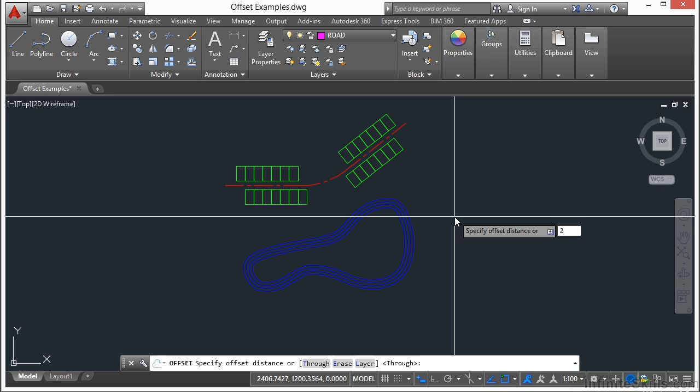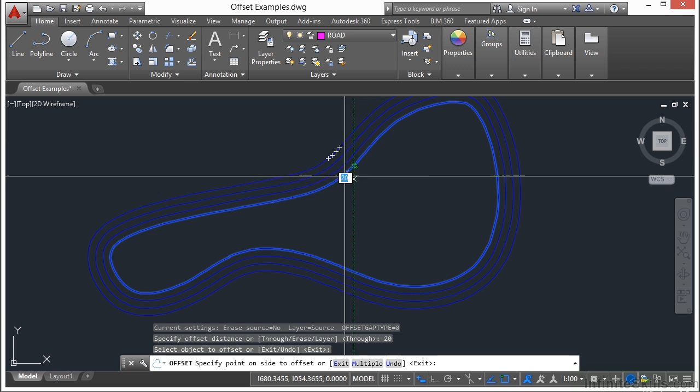First of all, you want to type in a distance. In this case, I'm going to type in 20. Press return. Now let's select the object to offset. I'm going to zoom in, pan around, and select this line right here. Now when you start this part, after you select the line, it starts right into the offset command. So you can see a little preview of where that new line is going to go. And I'm going to offset this line that I've selected by 20 units, either on the inside or on the outside of the line. Let me zoom in here a little bit closer.

You can even see as I move my crosshairs around that I get that little dimension there that AutoCAD is reminding me that, hey, you're offsetting this 20 units. And you get that little preview. Where the new line is going to be created relative to the original line depends on where you position your mouse according to that original line. So whichever side of the line you put it on, that's where it's going to go. So once you have your cursor in position, left click. And you have created a new line offset at 20 units.

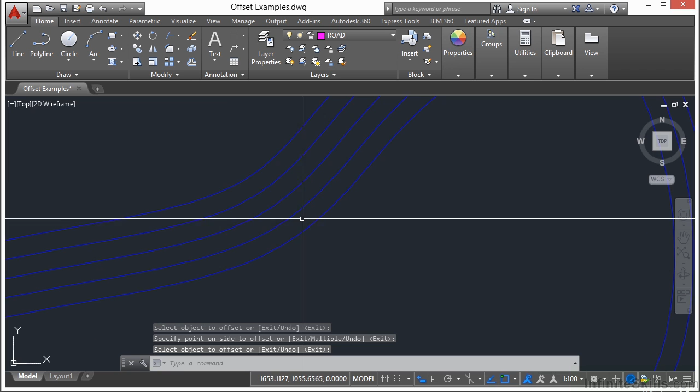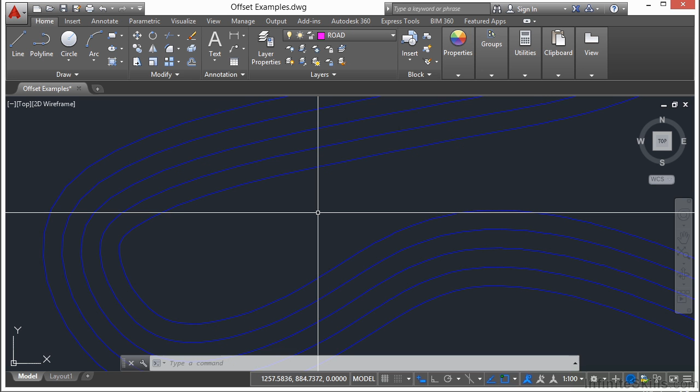So wherever I measure, if I measure an exact perpendicular distance from here to here, I am going to have two perfectly offset parallel lines that are 20 units apart all the way around. And it's actually that simple. So maybe you don't want to offset by a specific distance, but want the new line to pass through a specific point. So let's say you don't know what that distance is. You can do a couple of things. You can measure it, you can do the math, or you can guess, and then you can type in the distance. Well, the offset command has an option.

So for example, let's scroll up to this little roadway. We have the center line, we have the lot lines. Let's say we want to put a new right-of-way line that parallels the center line, but matches up with the front of these lots. I don't know what that distance is. So I'm going to start the offset command, press return, and you can see here that I have different options. Now these three options allow me to do different things.

One is the layer. This way I can offset my new object and put it on a specific layer, which is actually a very nice thing because a lot of times I don't want it to go to the same layer. It's kind of like doing a copy command. You can see here when we did our contour line, it copied that old one. It left it on the same layer. So I'm going to change the layer, type in L. I can say current or source.

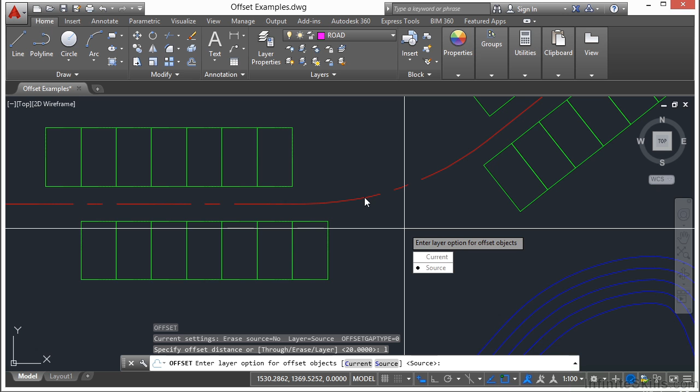So the source is the default setting for your offset command. And the source just means it's going to match the object that you're offsetting. I'm going to switch it to current because currently I'm on the roadway layer. Okay, so now when I create this, it won't be this red center line. It'll be a magenta colored line. And I can also pick an erase option. If I pick the erase option, which in this case I don't want to do, it will erase the original line and only create the new one.

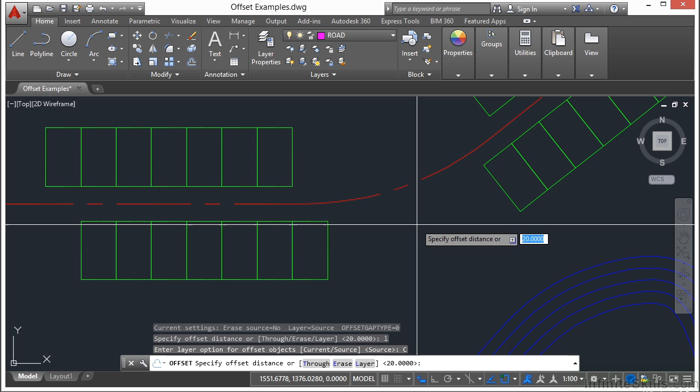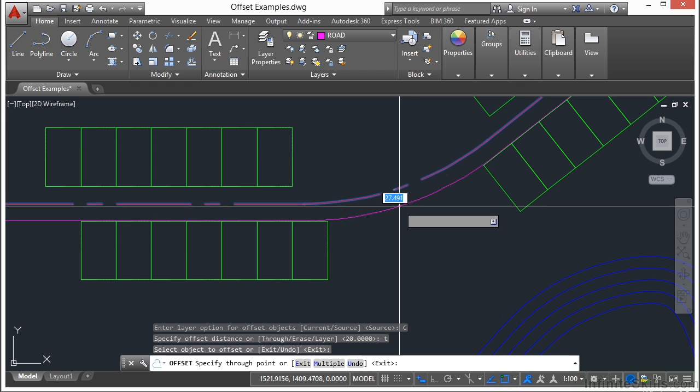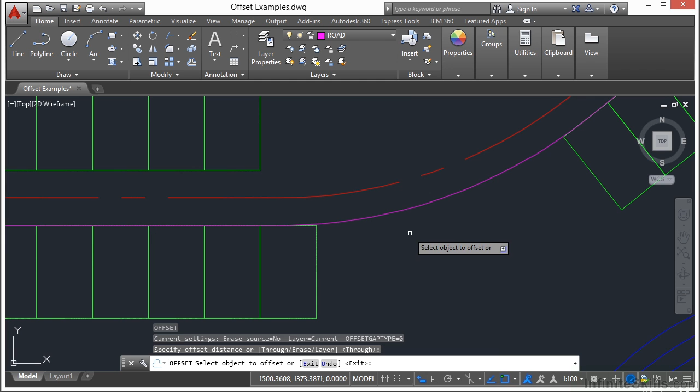I'm going to zoom in here. I'm going to snap to this endpoint, and there it is. So I offset this center line 30 units because I just used the through option and I put it to the current layer. Now if I offset again, if I just press enter, it'll default back to that through. Select this line, pick my other object, and there we go. Now I have my little roadway.

So you can see the offset command is very useful, very quick, very easy to do. It can help you to create a lot of different things, especially if they're long parallel objects. You can offset a line, a polyline, polygon, an arc, or a circle. You can do all of those sorts of things.